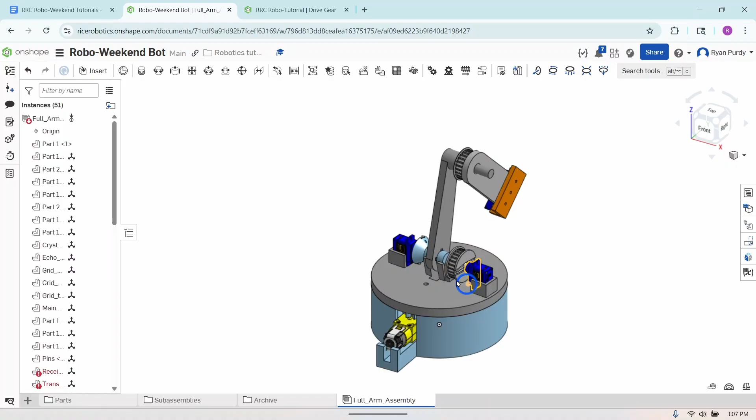So this is our third video, and this one we'll be designing this base plate, which sits on top of this base hub and rotates in this direction. It's rotated by this motor. Up top, it has some mounting positions for the servos and some support positions for this first link. If we hide this base hub, we can see that at the base of the base plate we have a gear, and that engages with the drive gear we've just created.

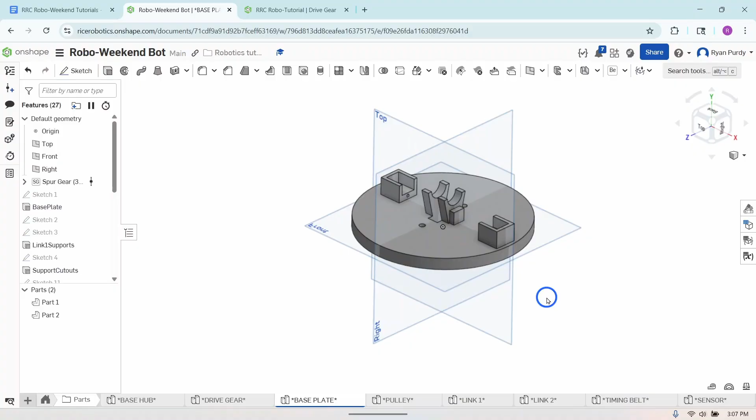And that's how this motor is allowed to manage the rotation of the base plate. So we'll be doing the CAD for the base plate here. This is what it looks like, and it'll start by creating this larger gear. Let's go back to our Onshape document. We need to create another new part studio, just as before. Name this part studio base plate.

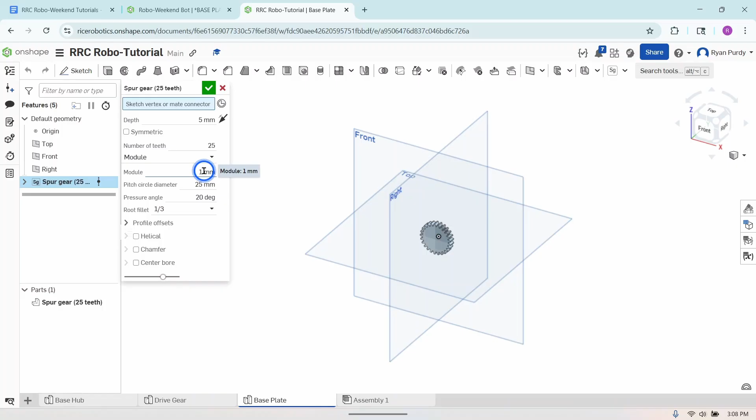So we'll start by creating another spur gear, just like in our previous video, using the custom feature tool we added in the previous step. In this case, it's very important that these two gears have the same module and the same pressure angle, because that's going to make them compatible with one another. Remember from earlier, we had a module of 2.5 millimeters and a pressure angle of 30 degrees. The depth doesn't matter too much, but here we're going to use a depth of 7.5 millimeters, and we want to make sure this gear has 32 teeth.

32 teeth means that this gear has 4 times as many teeth as the drive gear, which means whenever the drive gear rotates, this larger gear will rotate at 1/4 the speed. But that also means it will deliver 4 times the torque that it gets from the drive gear, which is good to know. That means we're basically increasing the torque of the motor delivered by the drive gear, but decreasing its speed by the same factor. So good stuff to know.

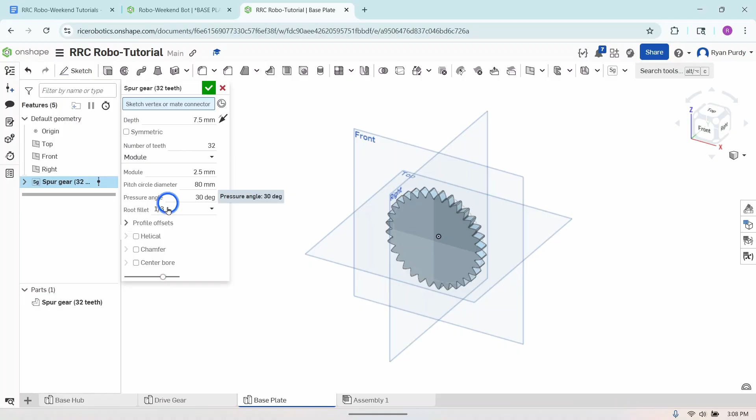Make sure that this root fillet is still 1/3. It probably will be. Click the green check mark, and now this gear is added. So now we're going to add a plate on top of this gear, or to the right of this gear, where all of our other components will sit.

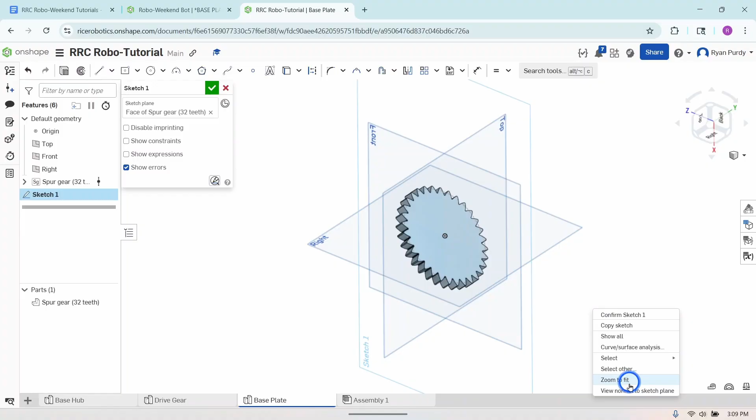So create a new sketch. Click the back face of this gear. Right click and reorient the view. So you've got to be careful — throughout this tutorial I'm often going to tell you to align things horizontally and vertically, but in this case you can see the z-axis is aligned horizontally and the x-axis is aligned vertically.

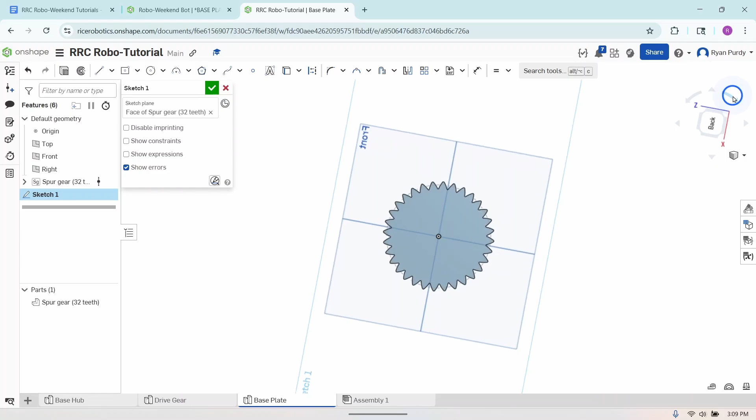Which is going to make our vertical and horizontal relations really weird. So instead, just make sure that x-axis, or whatever your horizontal axis is, is always actually horizontal, and that's going to avoid a lot of confusion for both of us. So that's what I recommend you do. And so this sketch is going to be another circle centered at the origin.

As always, pretty larger than the gear. And then we're going to add a dimension to specify its diameter — it's going to have a diameter of 140 millimeters. That's the exact same diameter as the largest circular edge of our base, if you remember. If you don't, that's okay — it is, trust me.

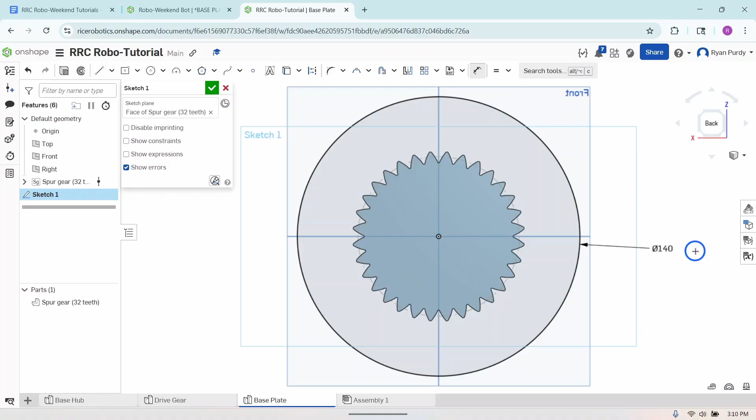And so that's the size of that circle. The sketch is fully defined, and now we're going to extrude that sketch and create the plate that sits on top of this gear. We're going to extrude this plate 10 millimeters, being careful, adding material, and create a plate on top of this gear. Click the green check mark to finalize the sketch.

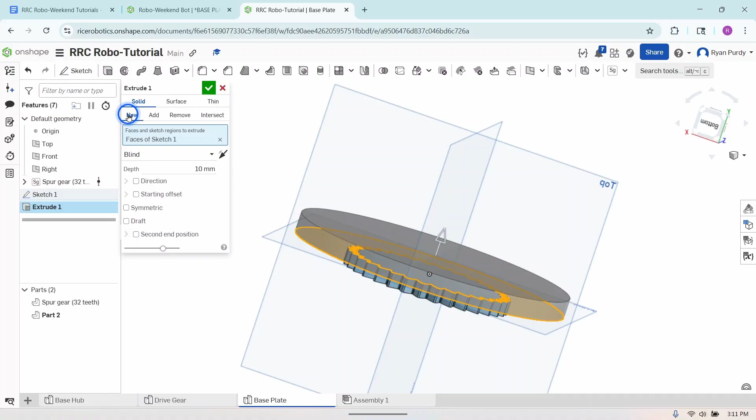Oh, it is important — we need to go back in. You can right click and edit feature at any time. I don't want to be adding material, because the gear and this top plate are going to be different bodies. So instead of adding, I'm going to make sure that we're actually creating a new body with this extrusion. Select new, click the green check mark, and now they're different colors, which indicates they are actually different bodies — which is what we want, because we'll be printing these two parts separately. So now make sure to name your extrusion.

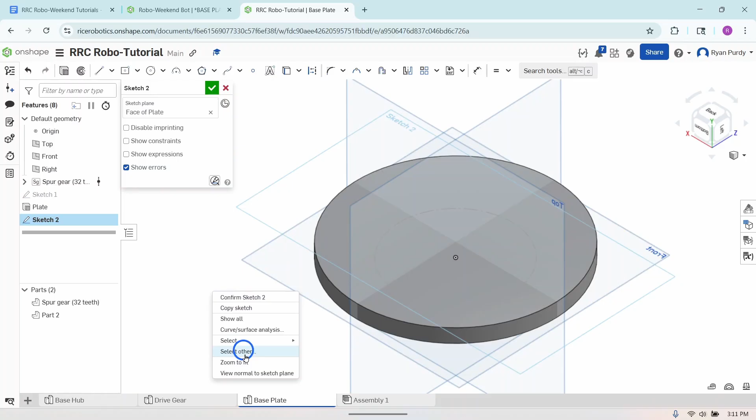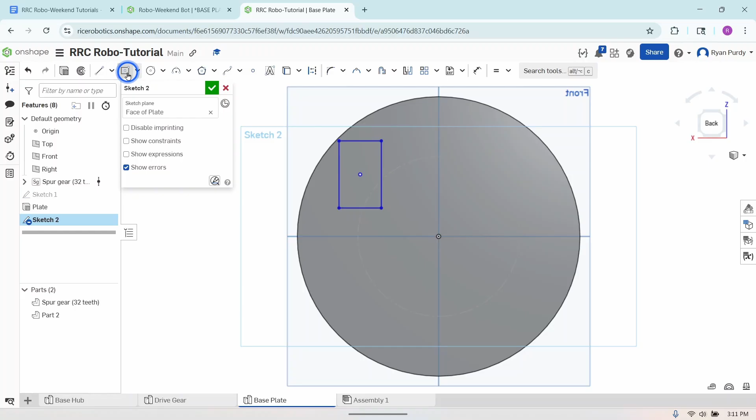And now we're going to create another sketch on top of this plate. We're going to draw several rectangles — first a center point rectangle. We're going to draw it anywhere, making sure not to align it with the origin in any way just yet, just draw it out in space. The dimensions of this rectangle: we're going to give it a height of 23 millimeters and a width of 7 millimeters.

By the way, what these are going to form are the support points that I showed you earlier for the first link of our robot arm. So the rectangle size is fully defined, but its position still needs to be defined.

To do that, we are going to horizontally align the center point of this rectangle with the origin, which you can either do by creating a horizontal relation just like before, or you can just drag it into place.

Now we need to create another center point rectangle. It's also going to have its center point aligned with the origin, but on the other side. We want this rectangle to be exactly the same size as the previous one, so just like when designing the base hub, we're going to use equal relations. Select the corresponding edges, and this rectangle will be made the exact same size as the other. Our sketch is almost complete.

First, we need to define the distance between these two rectangles, and we want it to be 10 millimeters. So we're going to add a dimension between their inside edges. 10 millimeters.

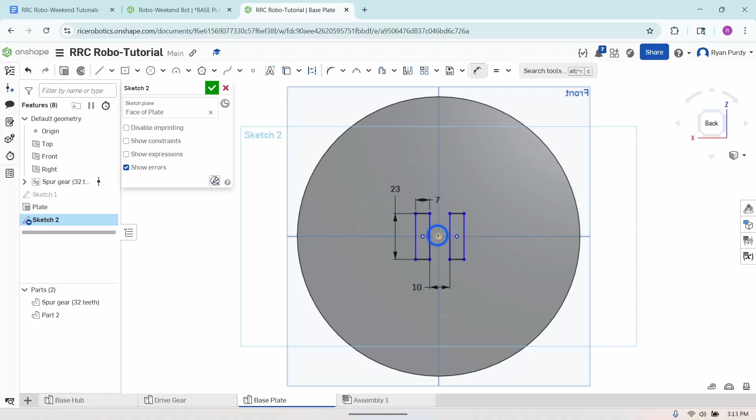Let me drag this over here. By the way, you can reposition dimensions at any time if they're overlapping each other. Just click the dimension and drag it to a more convenient position that's easier to see. So our last dimension is going to be a 5 millimeter dimension between the origin and this center point. Make sure it's 5 millimeters.

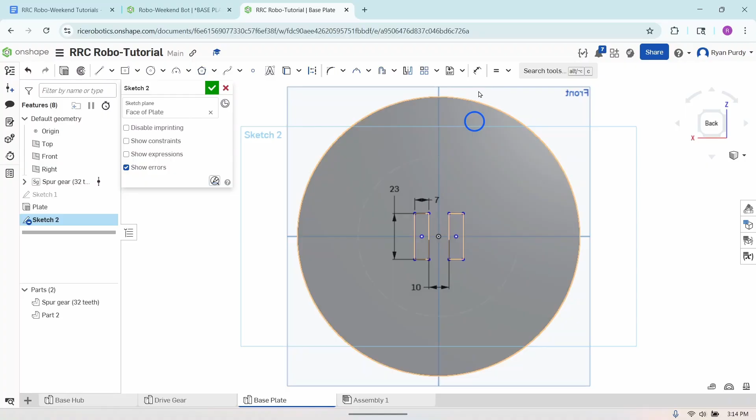Oh, I've made a mistake. This dimension doesn't need to be between the origin and this center point. If we want these rectangles to be centered on this plate, it actually needs to be between this edge and this center point. To fix this, I'm going to select this dimension, click delete, then remake that dimension and drag these around. Click the origin, and click this edge of the rectangle. Now I'm going to define 5 millimeters, and now it's fully defined correctly.

So our support points are created, at least the sketches for them are. We're going to extrude these up. By the way, if you're still in a sketch and you click extrude, it will automatically extrude that sketch up, which is a convenient way to save time if you know you're going to immediately extrude a sketch. I may be doing that a lot going forward, so keep that in mind.

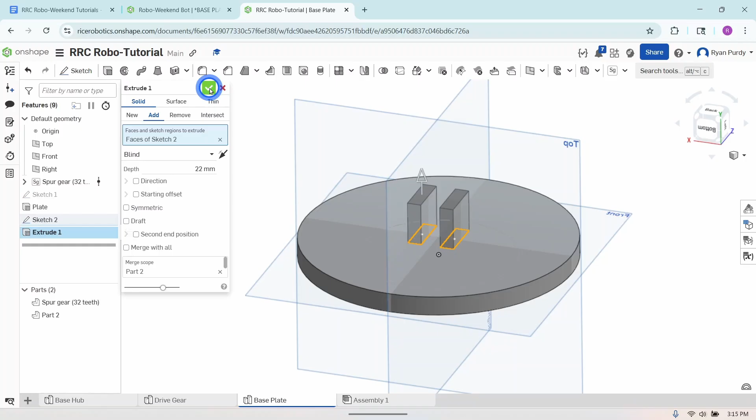So we're going to extrude them up away from the plate with a depth of 22 millimeters. Type that in, and now this feature is complete. Make sure to name the feature.

Now we're going to add some cutouts to refine the geometry of these support points. To do that, we're going to create a sketch on one of the outside faces of these rectangles. Make sure you're looking at it from this direction, so we're going to right click to reorient our view.

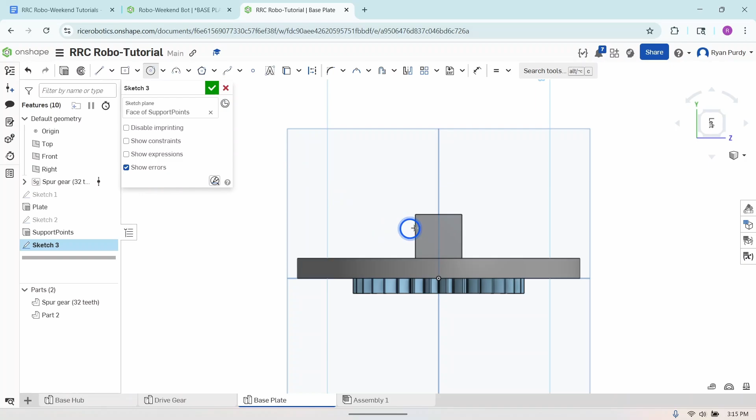First, we're going to add a circular cutout, which is going to go through the top half of these support points. So it's going to be a center point, and its center point is going to be located at the midpoint of this top edge. Just follow that edge until you see a box appear — that's when you know you found the midpoint. This circle is going to have a diameter of 15 millimeters.

Now that one is fully defined, but we're not quite ready to extrude. We first need to add some triangular cutouts here, and that's actually to make up for a poor design decision I made at an earlier stage in this process. I'll show you that whenever it comes up here in a second. Also, if you're more advanced and wanting to fix this problem, there are several ways to address it. I'm just being lazy, so keep that in mind.

But we're going to draw a triangular cutout that will fix this issue. So we're going to form a triangle on the right side of this rectangular extrusion. It's going to start in the top right corner. Make the second endpoint coincident somewhere along this bottom edge — make sure it's not the midpoint or anything like that, just somewhere like that. And then it comes over here.

You're still drawing a line, by the way. So the second line is going to end at the bottom left corner, and then it's just going to end all the way back up at the top right. And now we've created this triangle. To fully define it, we need to define the length of this edge. We'll add a dimension, and it is going to be 5 millimeters wide. So we've created the triangle, exactly how we want it.

Now we're going to mirror it across this line, so that we have one on the other side of the shape as well. Click the mirror tool from the toolbar, and select this to be the mirror line.

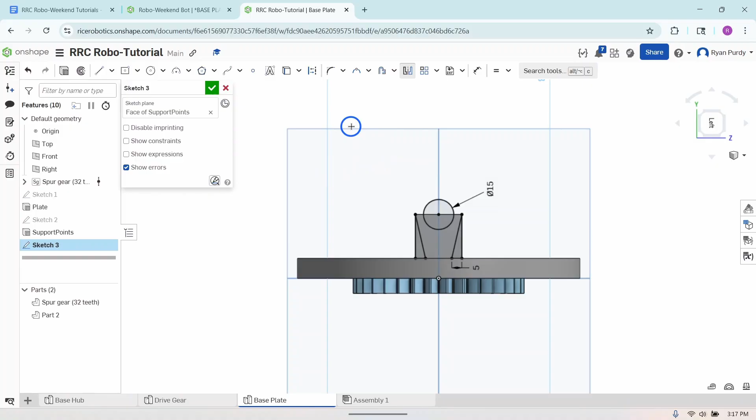Click mirror again, click the line, and just mirror them one at a time. Great, now the sketch is complete. We're ready to add this cutout, so click the green check mark, or actually, I'll just go straight to extrude.

Now we want to be removing material, and we want to cut all the way through these support points, through both of them. So just use a through-all ends type, which cuts through both of them. Now we have a bit of a leaner support that also has space for link 1 to sit.

You'll see what that actually looks like once we create link 1, but we're done with the support points for now. Make sure to name your feature as always.

Okay, now we need one more piece, which is going to look a little random right now. It's a very simple piece that we're adding. Create a new sketch on this top plane, then right click to reorient the sketch.

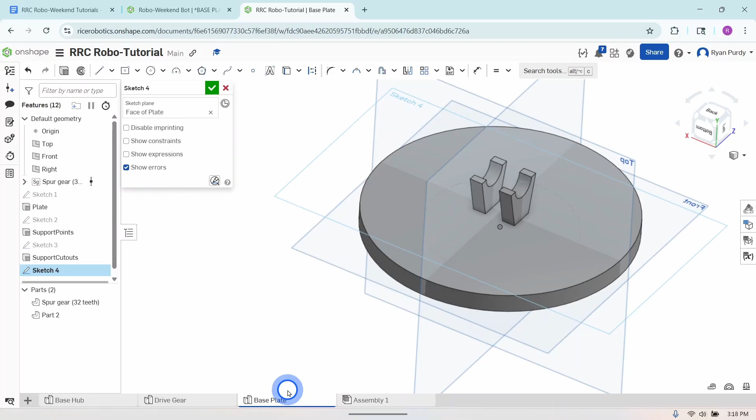Okay, and we're going to create a center point rectangle. It's going to be horizontally aligned with the origin.

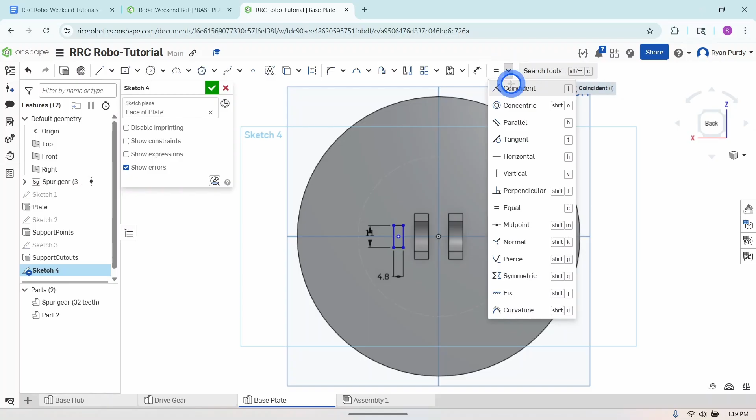And this dimension, it's going to be 4.8 millimeters wide, and then 11 millimeters tall. So 4.8 millimeters here, 11 millimeters here. And then we want this edge to be coincident, or on the same line as this edge here. So go to the relations menu, select coincident, make this line and this edge coincident. I'll make them sit on the same line, and now this sketch is complete.

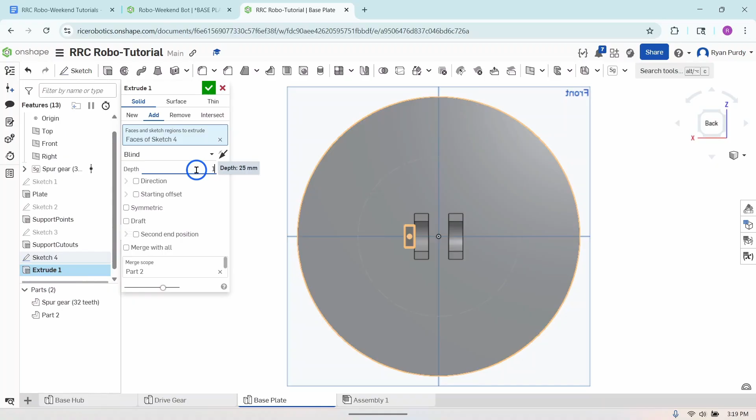Click the green check mark. I'm going to extrude this sketch with a depth of 11 millimeters. Click the green check mark.

And now I've created this little block. It looks a little bit random, but what it's used for is it'll keep our pulley in alignment once we connect it to the rest of the arm. So it's gonna be a little while before I can show you what that means, but just trust me, it is necessary.

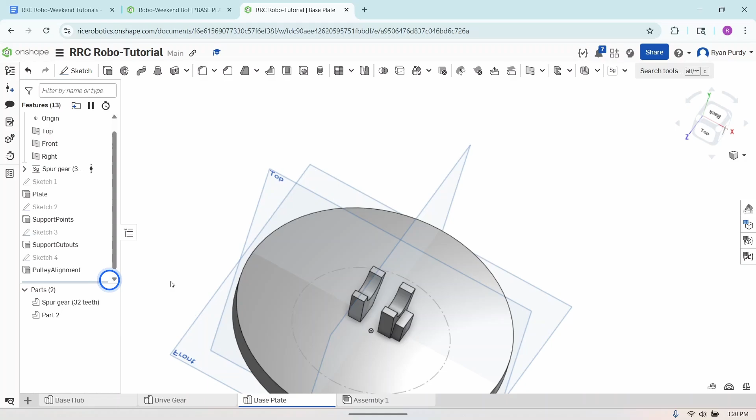Okay, so we've added the support points. Now we need to add those servo holders that we saw before. So we're going to create a new sketch on the top face of this base plate, then right click to reorient the view.

Okay, so we're going to draw a corner rectangle. Make sure to draw a corner rectangle, not a center point rectangle. Oftentimes they'll both work, but in this case, we're just going to opt for a corner rectangle.

It is going to have a height of 12.2 millimeters and a width of 15.7 millimeters.

And now we're going to see it may have been more convenient to use the midpoint rectangle, because it automatically gives you that point in the middle that you can use to reference other geometry. And we do want to align the midpoint of this edge with the origin. But since we don't have that midpoint, we're going to have to add our own point.

We're just going to add a point at the midpoint of this edge. So just drag along it until you see the box appear, then click to make the point.

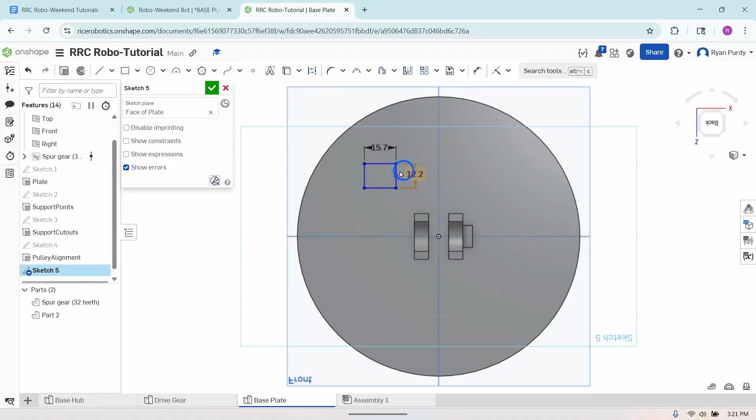Now we're going to align these two horizontally. Make sure that your x-axis is pointing in the right direction so we don't get confused. In this case, it is, so we're all good. Click horizontal in the relations menu, select the point we've just created and the origin, and now they're aligned horizontally.

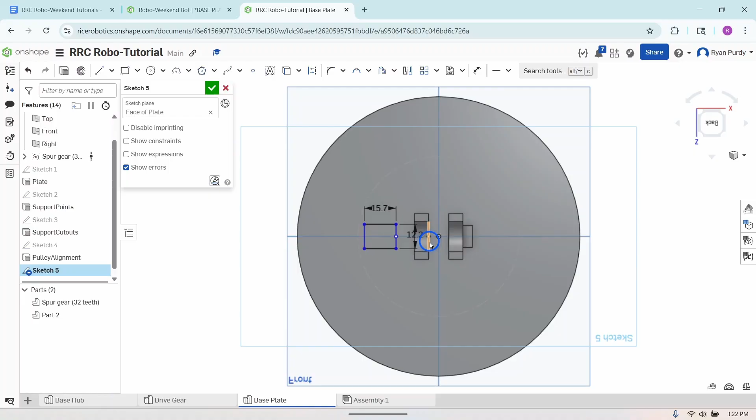And now we're going to lock this rectangle into place by specifying its horizontal position. So if I'm following the instructions, it should actually sit over here. Ooh, no, it shouldn't, it should sit here. So it's a little confusing, our view is thrown off a little bit right now.

We're going to rotate all the way around, so this is on the right side. Don't worry too much about that. Basically, we just need to add a dimension between the left edge of this rectangle and the right edge of the support point, and that dimension is going to be 25.7 millimeters. That's just the proper distance so that this pulley and the servo and everything is spaced properly once we put everything in the full assembly.

So this rectangle is fully defined, but now we're going to use a new tool called the offset tool. The offset tool takes existing geometry and offsets it by a set distance. Find the offset tool in the toolbar, it's right here.

Select all of the edges we want to offset. We're going to offset all edges of this rectangle except for this edge. So offset the top, right, and the bottom. Before confirming, we want to set this distance, and we want the offset distance to be 3 millimeters. So set 3 millimeters, and now confirm with the left click of the mouse. Click enter one more time to confirm the offset.

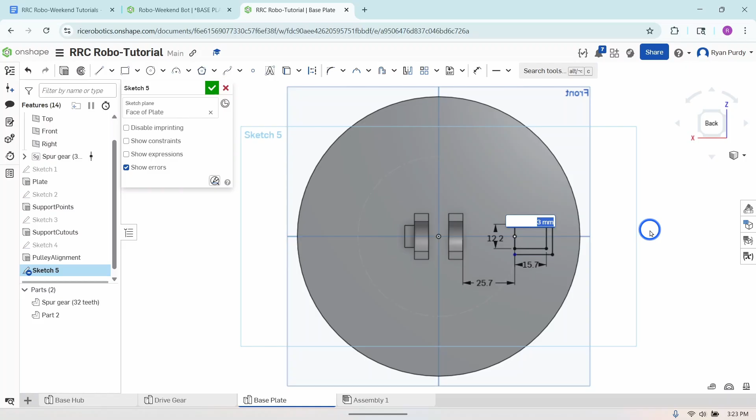Now it's almost fully defined, but these points are not fully defined because they aren't connected here yet, which is what I want to do. So we're going to need to add 2 small lines, one here, then one here, to fully close the shape.

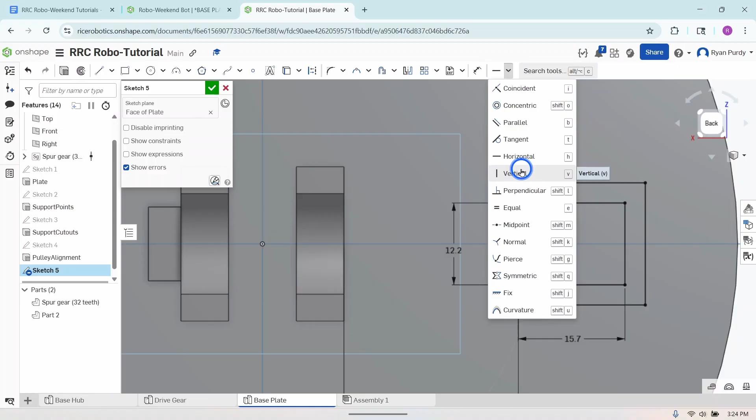The last thing to do to fully define it is zoom in a little bit and make sure both of these lines are constrained to be vertical, because right now we can drag it around and it can take all sorts of angles. We want these 2 blue lines to have to be vertical. So select the vertical relation from the menu, and then select both lines. Now the shape is fully defined.

Let's see, I'm a little worried I've messed something up here. We're going to go back a little bit. Maybe not, maybe it's all good. I'm just going to draw these lines again, here and here. Okay, never mind, I thought what was happening is I was continuing to draw, and so I drew another line in here. If you have geometry that's not accounted for, it can often make the modeling process very confusing, so you want to avoid that if you can. In this case, it wasn't an issue.

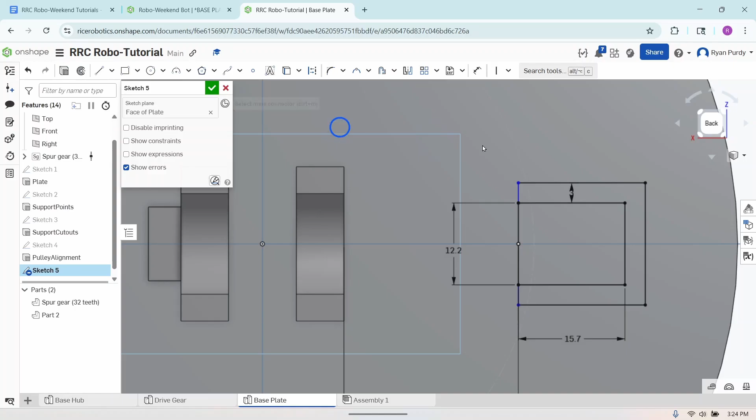So apply this relation again. Now the servo holder, the first servo holder, is fully defined. However, we want a servo holder on this side, and we also want another servo holder on this side.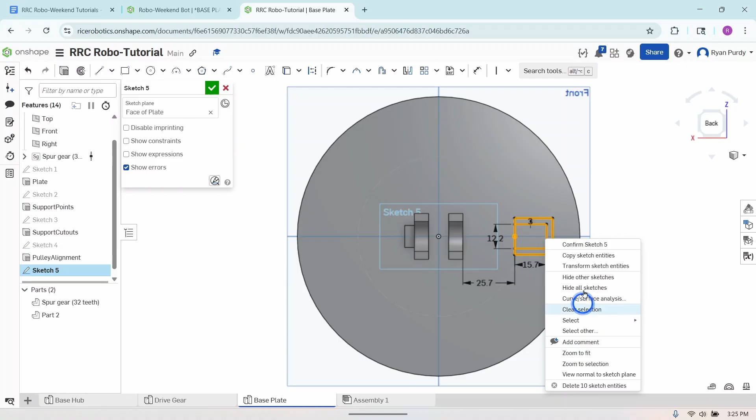So we're going to use copy and paste. Drag to select all of these sketch entities, right click, select copy sketch entities, click away there, and then right click somewhere on the left side of the base plate and hit paste sketch entities.

Once it pastes, it has all the sketch entities here, but it also gives you the option to move it vertically by a specified amount, horizontally, and then it also allows you to rotate it. That's what we're concerned with, because if the pulley mount opens this way, the pulley will be facing this way, but we want the pulley on this side to be also facing these support points.

So grab the rotational option, rotate it, make sure that says 180 degrees, type it in if you need to. Left click to confirm.

Now it's still underdefined because we still need to specify its position. So first we're going to align this midpoint, just like before, horizontally with the origin. Now it's constrained there, but it can still slide in this direction, so we need to constrain that distance.

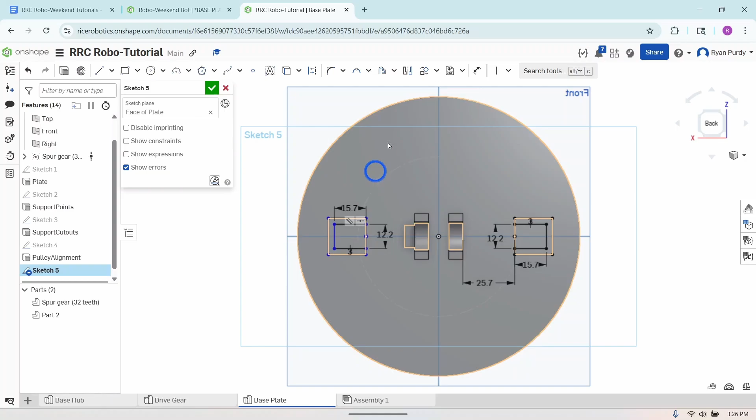Then we're going to add a dimension to fully define this second servo holder. It'll be between the rightmost edge of this servo holder and the left edge of this support. Make sure you're not getting this edge of this rectangular piece we added to support the pulley. Make sure you're getting the left edge of this support here. That distance is going to be 35 millimeters. Okay, great.

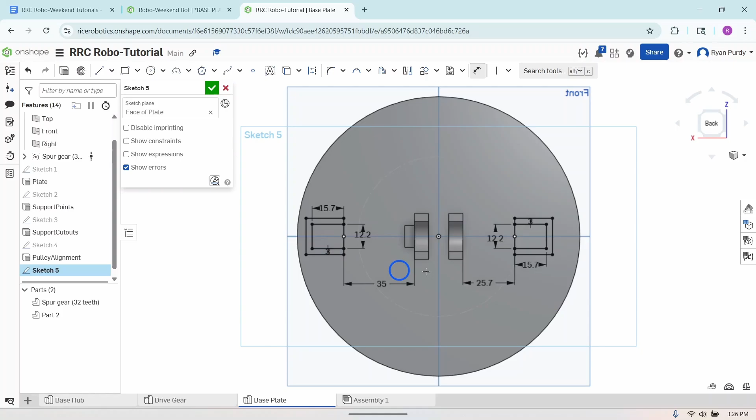Now this sketch is fully defined, and now we're going to take this geometry and actually make two new extruded features. So click the green check mark.

We're going to start by extruding the inner rectangles. This will form the platforms where the servos will sit. So select extrude, and instead of selecting the entire sketch, first just extrude these inner rectangles. It is going to be a blind extrusion, and we're going to extrude them with a depth of only 5.6 millimeters. Confirm that, click the green check mark.

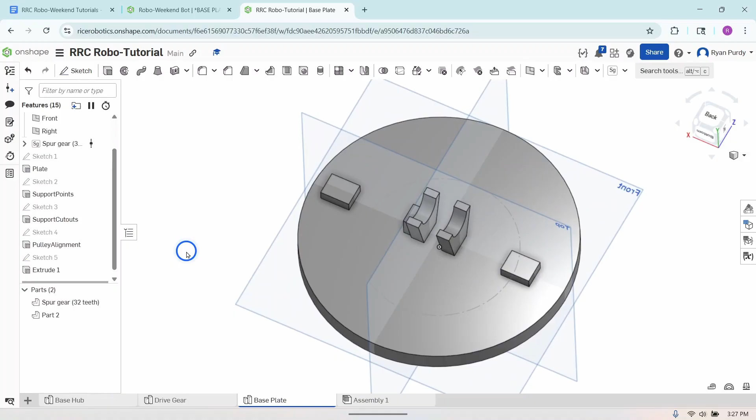Now we're going to add another extrude feature from the same sketch. Hover over that sketch in the feature tree and unhide it so you can still view it. Now we're going to create another extrude feature, selecting the other geometry we haven't extruded yet. This is going to create a frame, like a set of walls that will hold the servo in place. We're going to extrude that, and that's going to have a depth of 25 millimeters.

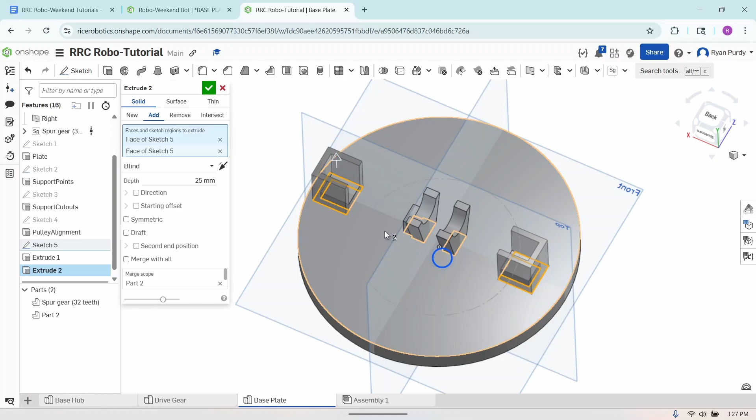Adding material, and now the servo mounts are pretty much complete. Now we have a spot where we can sit the servo, and it won't move around all over the place. It's pretty much constrained to sit exactly where we want it, which is great. We name these features.

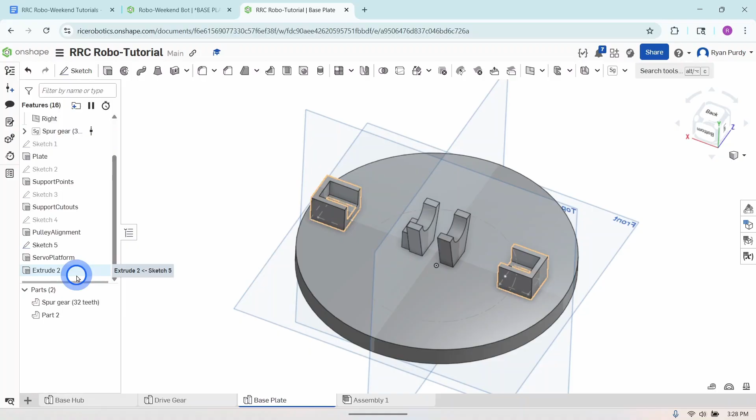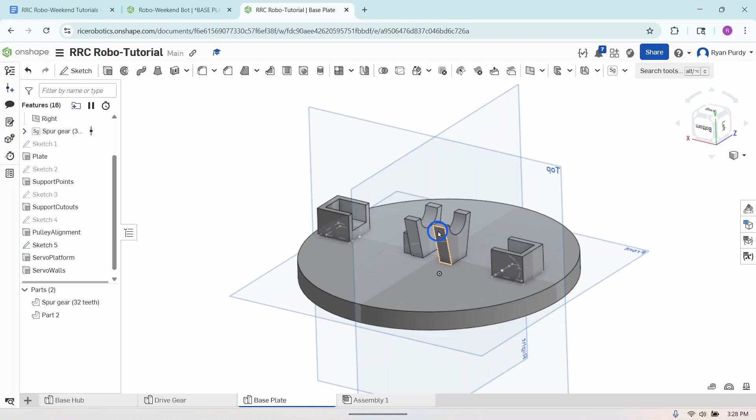To actually fully position those servos, we're also going to need a hole in each of these servo mounts so we can screw in a bolt that'll fix that servo in place. This is where my questionable design decision came in, and you'll see it in just a second.

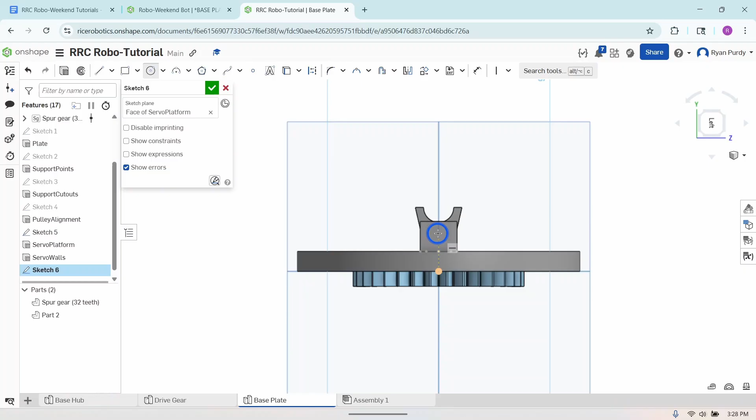We need to add two features, one hole to each of these servo mounts. Create a new sketch on the face of this servo holder, then reorient the view. It's difficult to see what you're doing here, but we'll rotate in a second. We're going to draw a center point circle, centered and vertically aligned with the origin. It's a little confusing because it's using Y as the vertical direction and Z as the horizontal, so it says we're making a horizontal dimension, but it doesn't matter as long as it's aligning with the origin correctly.

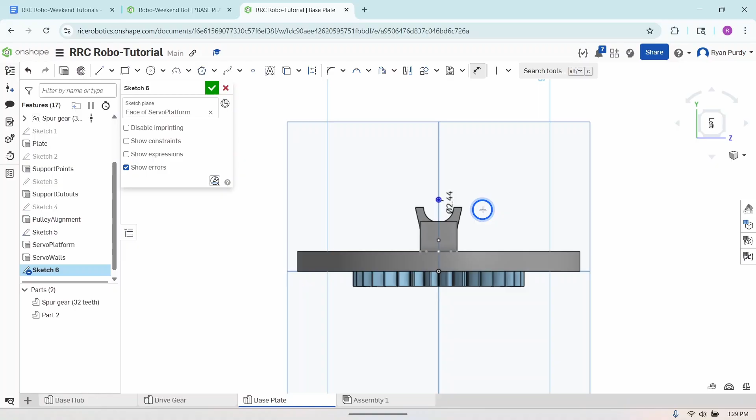This circle will have a diameter of 2.44 millimeters. Then we need to properly position it on the servo holder, adding a 2.95 millimeter dimension between the center of this circle and the top of the base plate. That vertical distance should be 2.95 millimeters, which will properly position our hole.

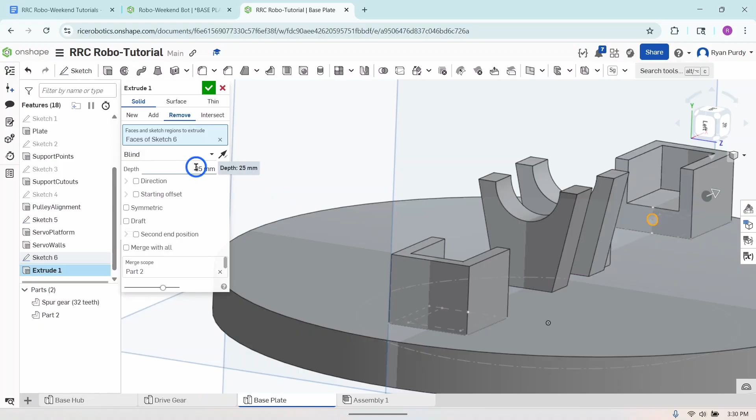It's fully defined, so now we're going to extrude this hole for the circle. You can see it's on the proper surface. We want to remove material, cutting into the servo mount with a depth of 5 millimeters. Click the green check mark.

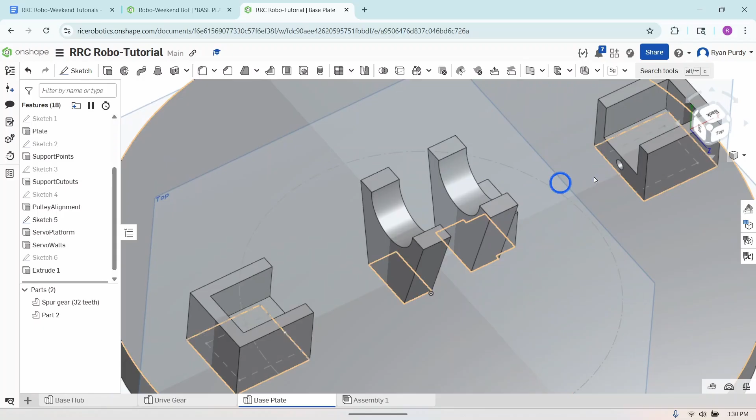Here's my poor design decision: whenever we actually print these parts and try to screw this in, it's going to be very difficult because you can't come in straight, since you have support points here. Getting a screwdriver in from this direction is difficult. You can come in from the top, which works fairly well but is still difficult, or you can come in from the side, which is much easier if you add this inclined cut. That's why I added that cut.

There are definitely ways to avoid this issue in a much better way, so if you want to try and implement that, go for it—definitely explore your options there. But for this case, we're just going to live with the error of my ways.

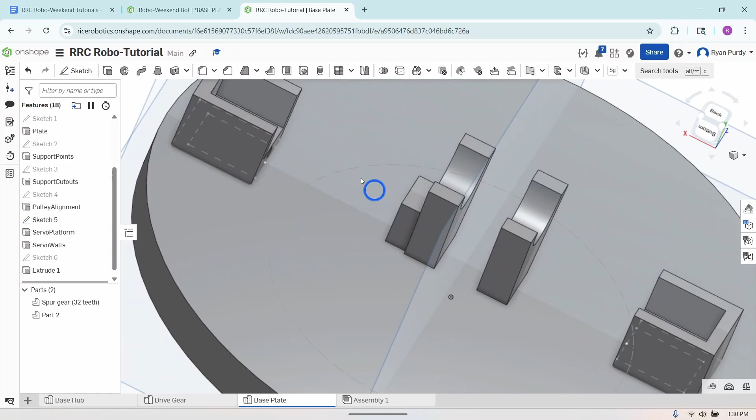So we're going to create another one on this other servo mount. Create a new sketch on the same type of face as before, just on the servo mount, and reorient the view—this is going to be exactly the same. Center point circle aligned with the origin, with a diameter of 2.44 millimeters, and a dimension that says it's 2.95 millimeters vertical from the top of the base plate.

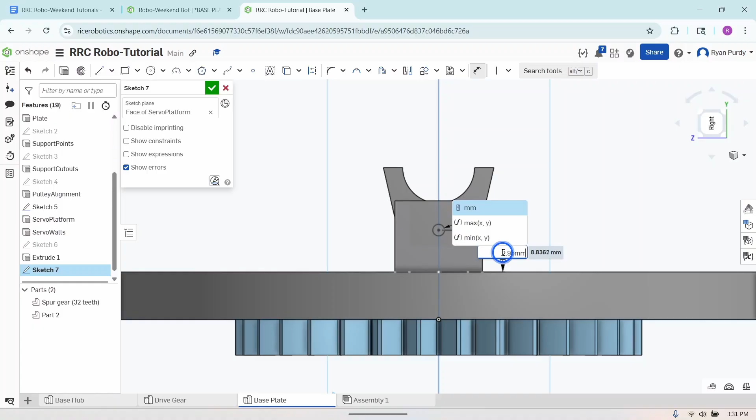We're going to extrude this one as well. Make sure that sketch is actually on the correct face, which it is. We're going to remove material with a depth of 5 millimeters, then click the green check mark to confirm the feature.

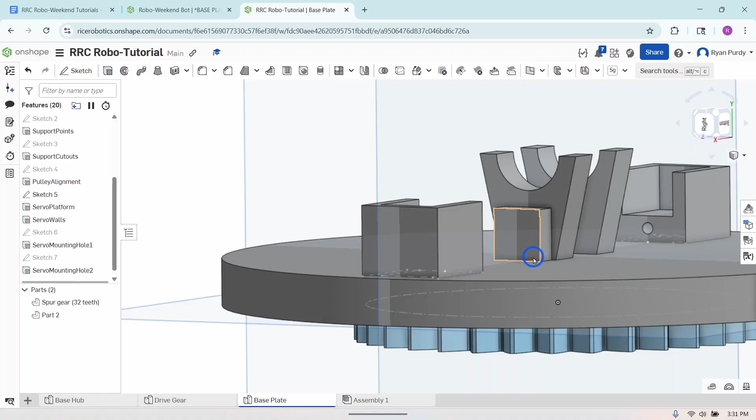Make sure to name these. You don't have to name these exactly like I'm naming them—just name them so that both you understand what they are and someone else who comes in could feasibly understand what purpose they have in your overall design.

So the servo mounts are complete, and now we need to add a few more features just to add cutouts that will both connect the gear to the base plate—or we can put a bolt that will connect them together—and we also need to add some holes so that wires can get from the top of the base plate down into the base hub.

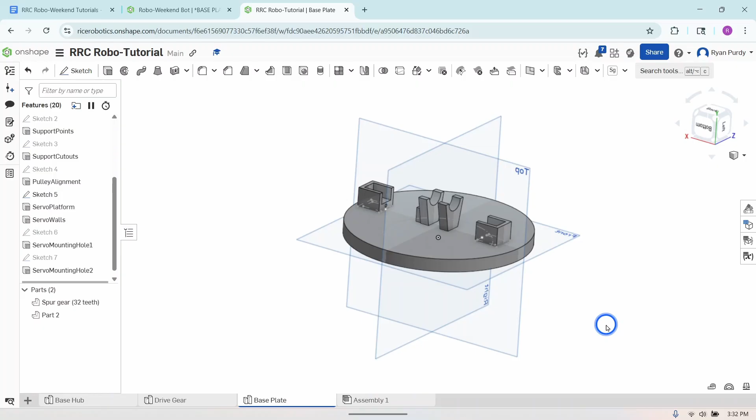We'll start by creating a sketch on the bottom face of the gear. Create a new sketch on this bottom face, right click to reorient the view. Now it's going to be a circle, centered at the origin, and it's going to be 20 millimeters in diameter.

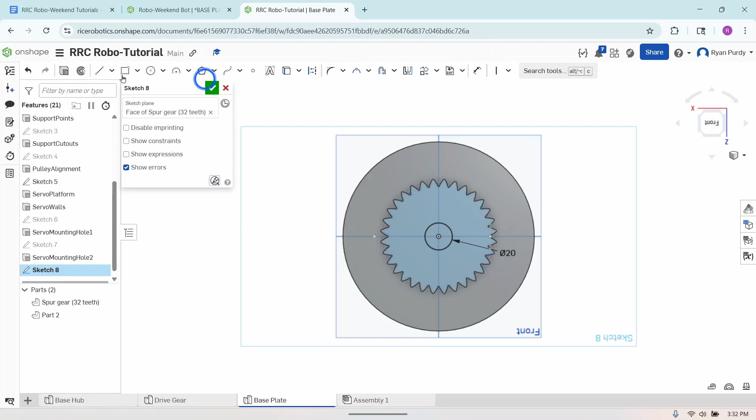We've done this a bunch of times already—use a dimension to specify the diameter to be 20 millimeters. Now the circle is fully defined. We're going to extrude it, and we want this circle to remove material all the way through the gear, but we don't want it to mess with this base plate.

There are actually two different ways you can go about doing this. First, make sure that we are removing material. You can either use the up-to-face type like we've done before, which extrudes this circle and removes material up to the bottom of the base plate, or you can use a through-all condition. You can do that because the gear and the base plate are different bodies.

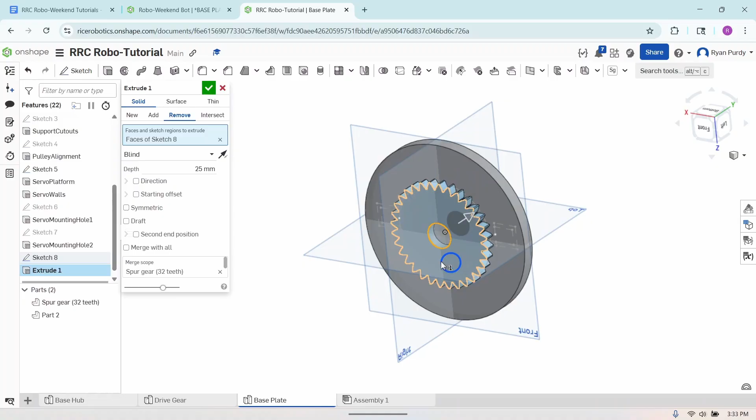So you can say that this cut will only apply to this gear, and the way you do that is by specifying the merge scope. We're going to extrude, through all condition, and it's asking for merge scope. It says there's an error because we haven't told it to merge with anything, so we're going to say merge with all.

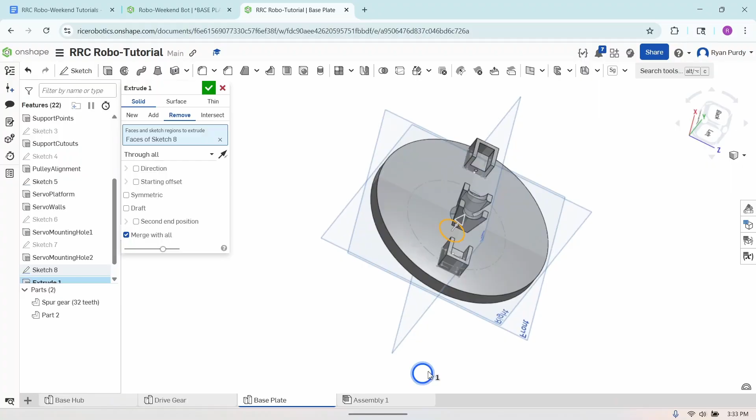If you merge with all, you can see it cuts all the way through both the gear and our base plate, which is not what we want. So instead, we're going to merge not with all bodies, but just with the gear. Down here we have our bodies listed, and we just want to cut through the spur gear. You can see it's still a through all cut, but it's not doing anything to our base plate, which is great, that's what we want.

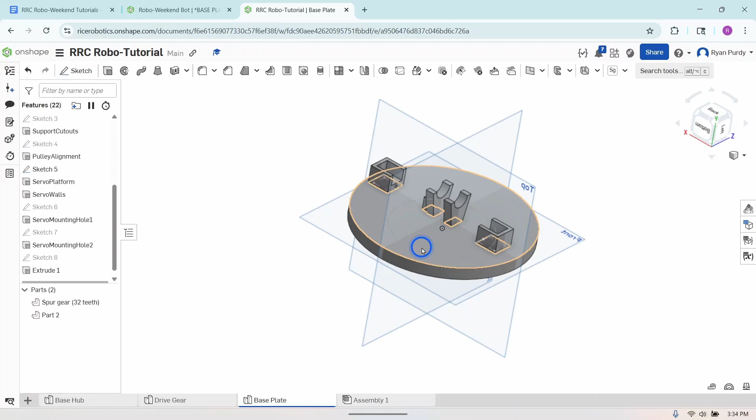So confirm the feature, and now we'll add another cutout. It's going to be on the top of our base plate. This is how wires are going to get down into the base hub. We're going to draw a corner rectangle.

Its first corner will be at the... I see, okay, so instead we're going to create a center point rectangle.

It's going to be centered at the origin here, so mark the center point there, and then just kind of drag it out to any point. We'll constrain it more in a second.

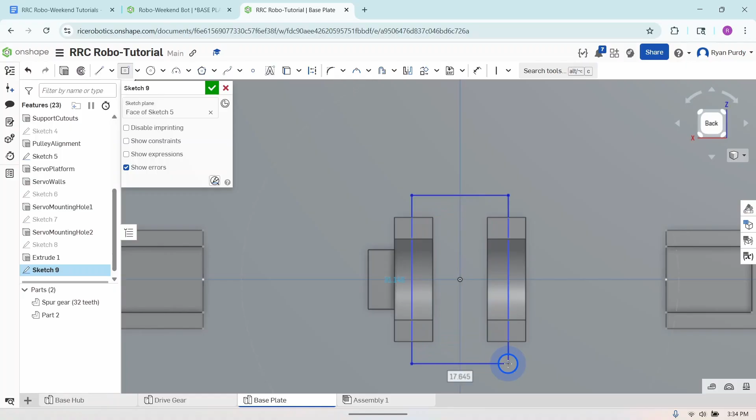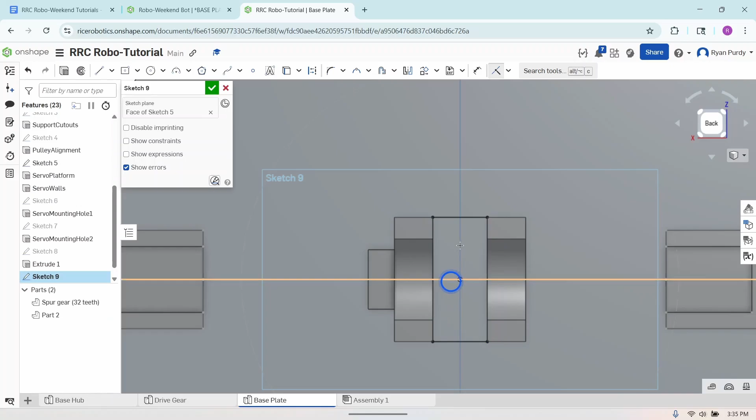Now I believe we'll want to make this edge coincident with this edge, and we'll make this edge coincident with this edge. So select coincident, click the top edge here, the top edge of the support, it locks it in that direction. Do the same with these two edges. Now we've filled in the space between these supports with a rectangle, and that will be used for our next cutout. The sketch is fully defined, so click extrude.

We're going to be removing material, and we'll do exactly what we've just done with the gear. Make sure the merge scope is only part 2, which I should name, but in this case is just the base plate. Give it a through all condition. Click the green check mark.

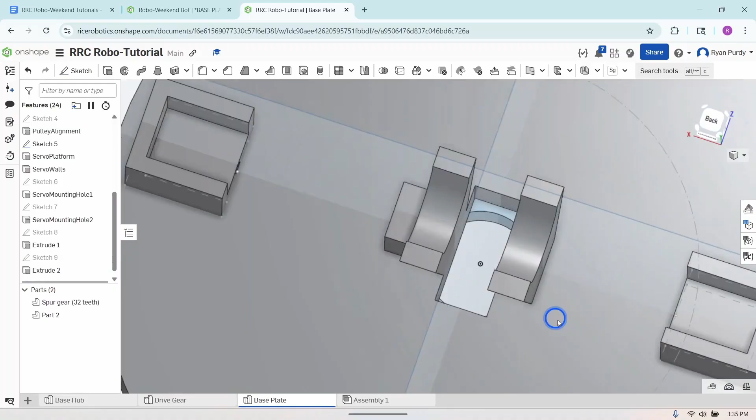And now you can see we have this rectangular hole, and it goes straight into our circular hole in our gear. That's great. That allows a path for our wires to move through so that they can access the electronics.

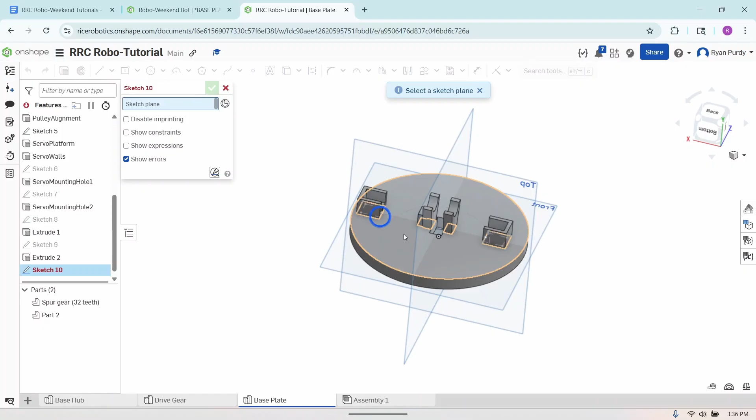Okay, we're almost done, I promise. I believe we have one more feature, and it will be the holes that will allow us to attach the gear to the base plate. So it's going to be a sketch on the top face of the base plate. Reorient the view normal to the sketch plane.

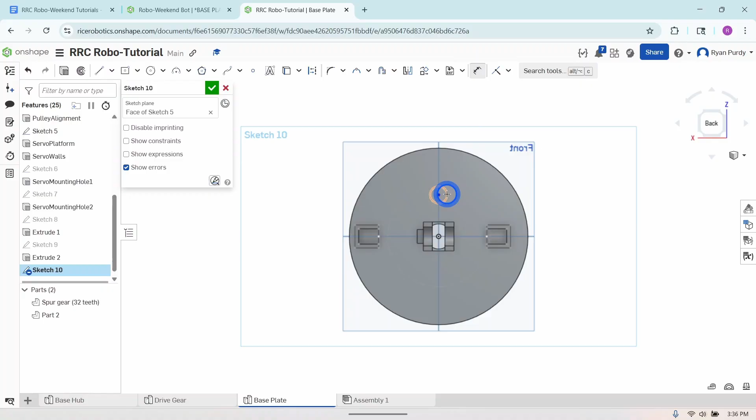Okay, we're going to need two 5mm circles to mount the two bodies together. So we're going to draw a center point circle, its center vertically aligned with the origin. Use a dimension to make the circle's diameter 5mm.

Now we want to define the vertical distance between the circle's center and the origin to be 23mm. Great, so now we want another circle on the opposite side of the gear so we can connect them very well together. So use the mirror tool.

We're going to mirror this circle about this line. So select the mirror line, one that divides the gear in this direction. Select the circle, and it'll mirror it automatically. Now our sketch is complete.

So we're actually going to extrude both of these circles all the way through both parts, because they'll be used to connect the gear to the base plate, so they should be in the same positions.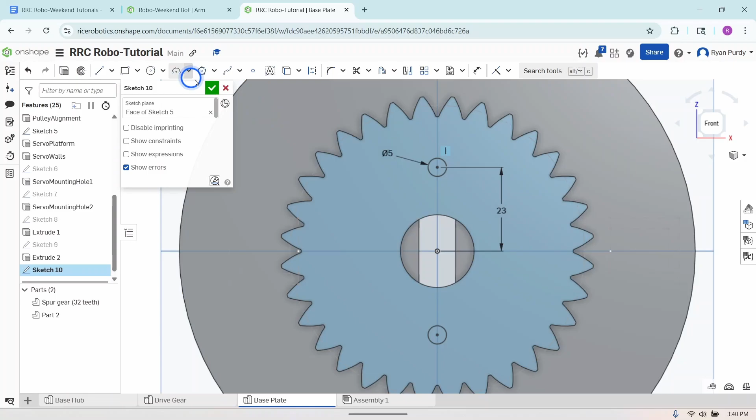So the gear is complete. Go to extrude, and we'll extrude it through all parts. It says right now it's only merging with the base plate, but we actually want it to merge with all, so check that option. We want to remove material, and we're going to use another through all end type because we just want to cut through all of the materials.

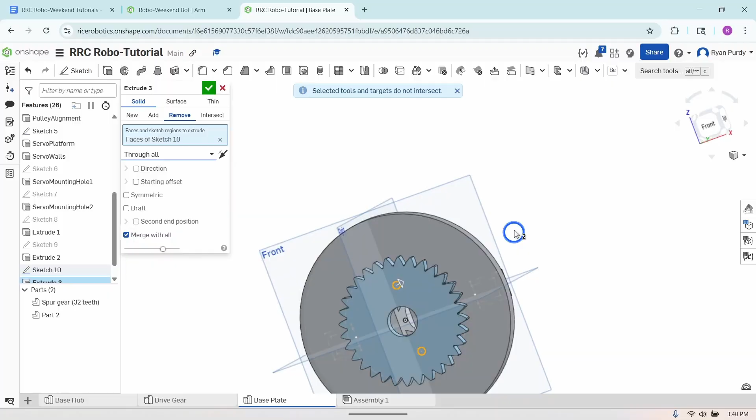Let's see, what's that about my choices? Oh, I see, okay, so we just need to make sure we reverse the direction, and it'll cut down, removing material from both the gear and the base plate. Click the green check mark to confirm.

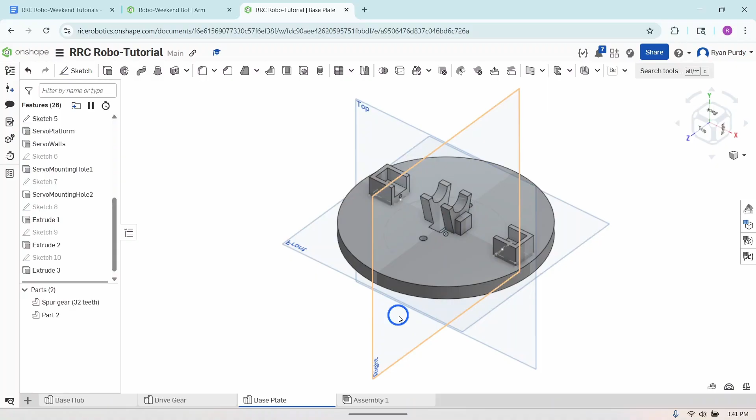And now this base plate is complete. We have spots for the servos to sit, a support point for link 1, a support point for the pulley, some holes so the wires can go from the top of the base plate to the base hub, and we have a gear that allows this base hub to be driven by the motor.

Great job, that was a complex one, took a lot of different features. Make sure to name these features so everything is clear.

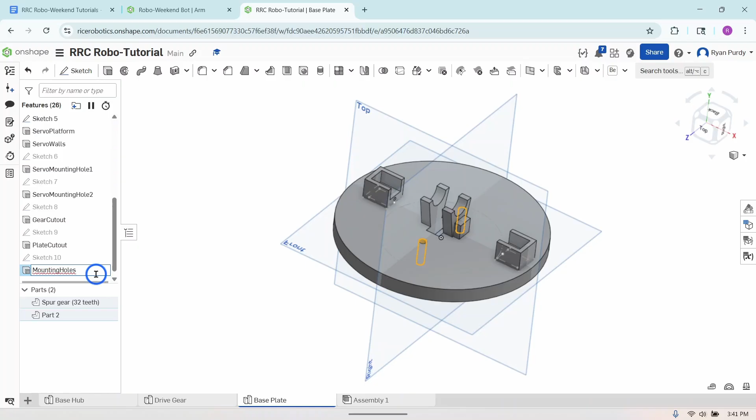Okay, and now this part is complete, so we'll move on to the next one.